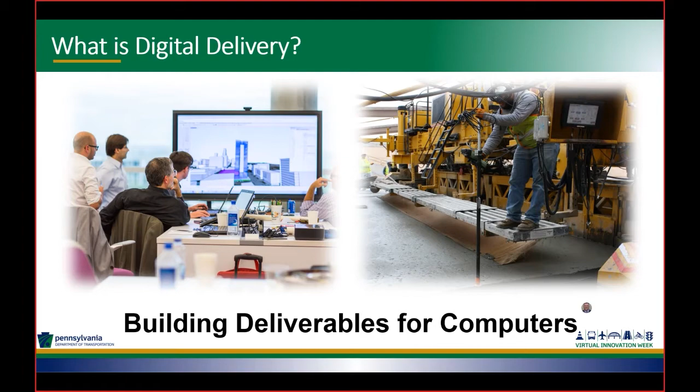What is digital delivery? The basis of digital delivery is really building deliverables for computers. These deliverables are both human readable and machine readable. So digital delivery is the use of digital data to deliver projects.

It's going to be the transfer of relevant information from design to construction to asset management. Right now, whenever we design a project, we gather quite a bit of data in that design aspect, then break that information into 2D plan sheets to deliver out to construction. What we want to do is break that cycle and continue the movement of that relevant information from design to construction.

Right now in our asset management, we get a red line plan that is marked up, and then we get that back to the department, which is considered our as-built plan. We want to be able to make that full life cycle of a project and bring that relevant information back to the department. So we're going to go from design to construction to asset management, and be able to use that data again and again.

It will offer us a new way to view and understand the design in the field. Whenever we put out a digital project, it could be a 3D model. So your inspectors and contractors will be able to view this in ways we've never been able to view projects before. You're going to be able to see the bridge and the roadway all together in one view.

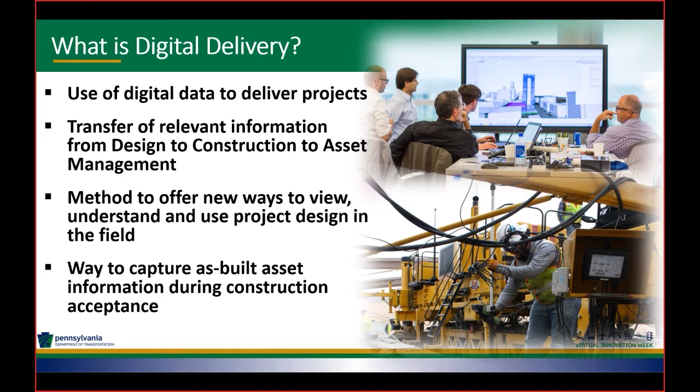So the Digital Delivery Directive for PennDOT is really a time to embrace a new way of doing things. We've always done the design the same way, whether it was back drawing on the drawing boards or today in today's CAD station.

But why? We need to start thinking outside the box and change everybody's mindset because that's how we've always done it. We need to innovate and look for ways to improve what we're doing and be able to show different ways of our design intent.

We need to stop taking that smart data that we're developing during that design process and breaking it into less meaningful pieces.

So there we go. PennDOT's vision: by 2025, construction projects will have the ability to be bid using 3D technology and no longer be in a traditional construction plan format.

This will include the ancillary plans, such as your traffic control plan, your E&S plan. But we do realize there will be projects that don't lend themselves necessarily to being designed in 3D, but will lend themselves to being digitally designed. Again, that is taking that relevant information from design into construction back to asset management.

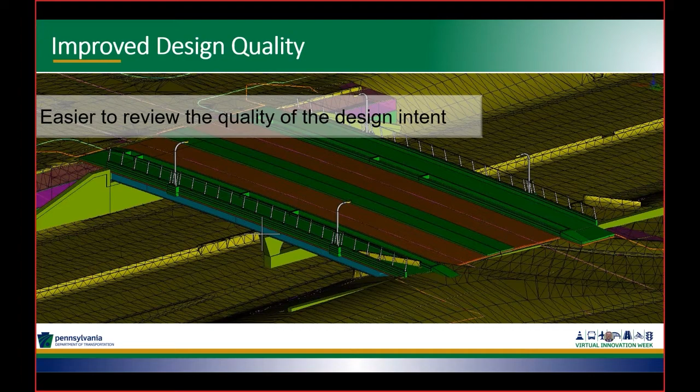With improved design quality, once everyone starts designing using a model-based approach, it will be easier to review the quality of the design intent. A 3D environment allows you to view the design in a way that was just not possible with 2D plans. A model-based design approach will give us the opportunity to review our design intent before we bid the projects, and we'll be able to see the roadway and bridge design details together, which will allow us to find issues early on.

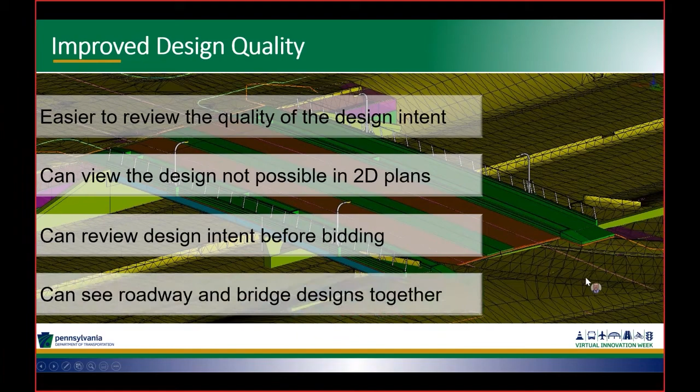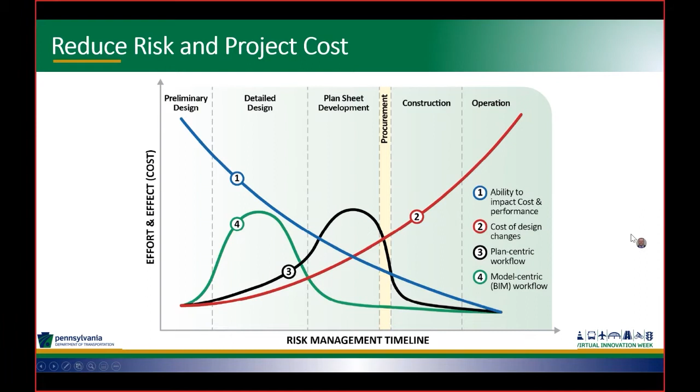So increased construction efficiency. In addition, with the 3D deliverables, contractors will be able to leverage all of this information with their automated machine guidance equipment and survey equipment to check the grades. Today, contractors are using the equipment based on the 3D models they develop from our contract plans.

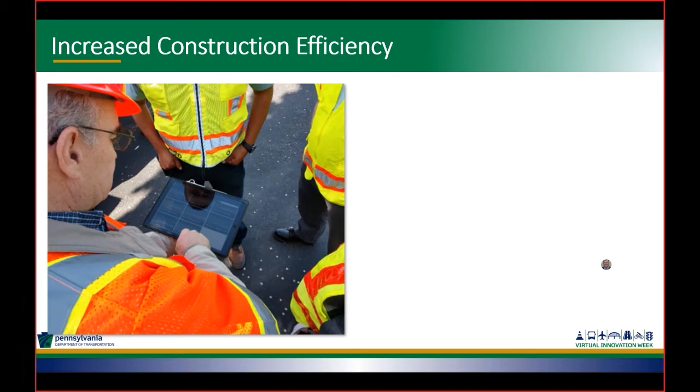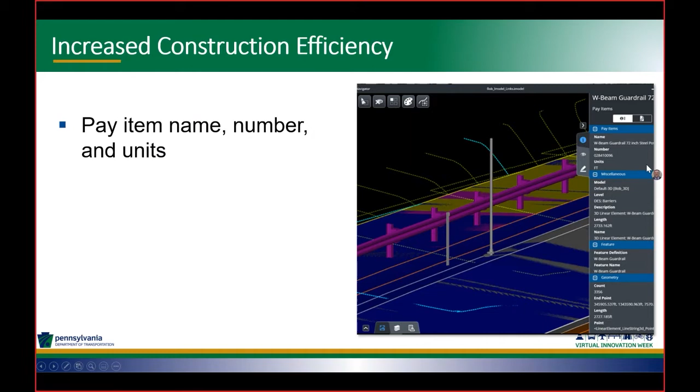So during construction, inspectors will be able to use their mobile devices with model viewing software to actually determine exactly where they are located. The 3D models for construction will offer us an opportunity to extract attributes of these elements right there, so you'll be able to look up the pay items, the units, the level it was drawn on in CAD, the description of the object, the actual length. We'll be able to attach pictures, and you'll be able to attach the standards right to an element.

As coming up through the design ranks, getting that design intent out to construction is vital. Sometimes in construction, they have no idea why the heck the design put it in this way. Well, this will help us convey that design intent to our consultants, contractors, and inspectors that are looking at it. We can add pictures, we can add 2D details. There'll be so much information that we will be able to add to this model to convey, again, that design intent.

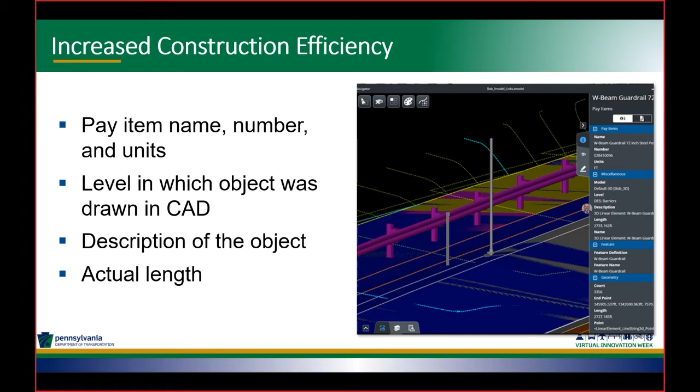But with 3D models, we will get that actual design and be able to incorporate it into a 3D model that we plan to build as the department, which will be considered our digital twin. What we would like to do is build this digital twin for our entire network. Now, that's going to take quite a few years till we actually build this out, but again, you have to start somewhere.

With that information, we'll be able to bring in all of the 3D models that have been created across the state. That way, we don't lose that information that we're losing now. Right now, we lose that information when we transfer from that 3D design to a 2D plan sheet and out to construction. We want to keep all of that information and then build upon that.

So when a utility goes to put a new gas line or water line into our right-of-way, we identify exactly where that's at and then build that back into the digital twin that we would like to develop. That way, in the future, when another project comes out there, we know exactly where all of those attributes are as we move forward. So again, digital delivery is that full life cycle of a project, transferring that relevant information we're developing in design all the way through to our asset management system.

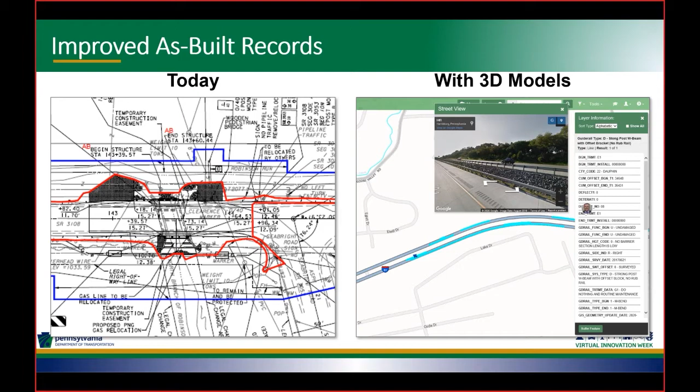So with that, that was a quick overview of what digital delivery is and where the department is going. And I can answer any questions that you may have.

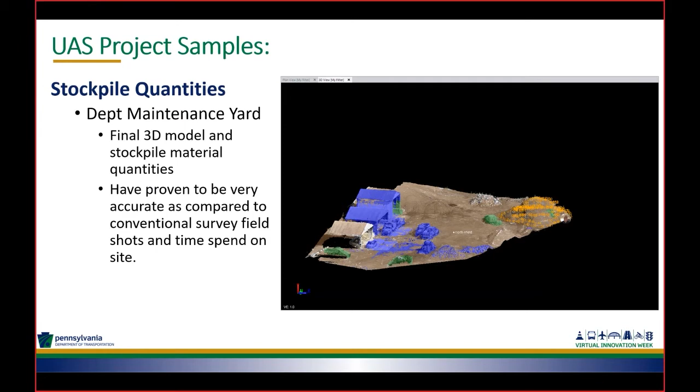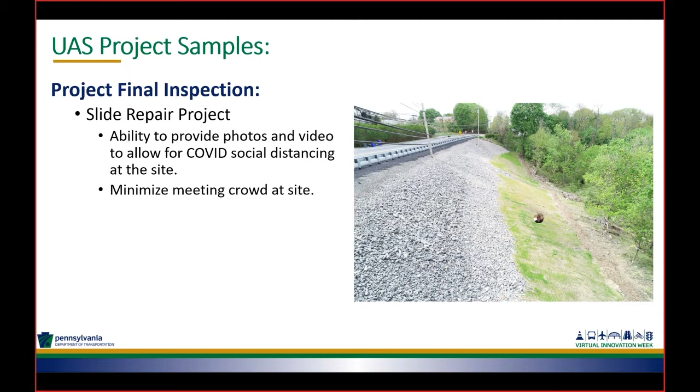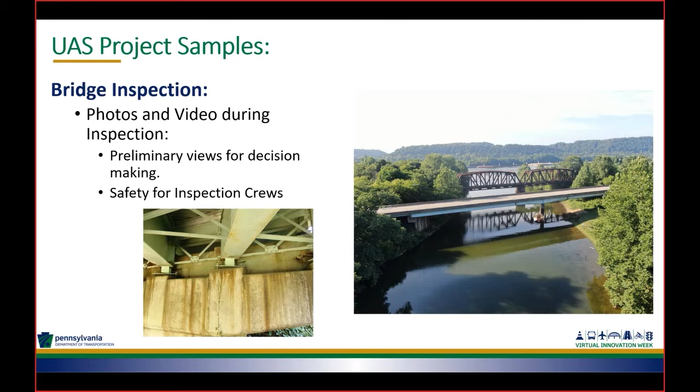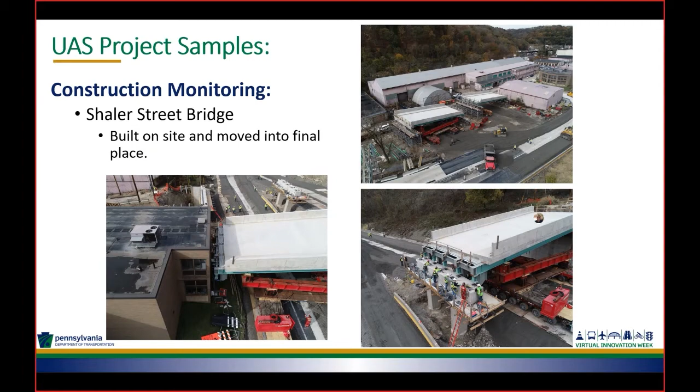I think that's all I have, so probably some questions.

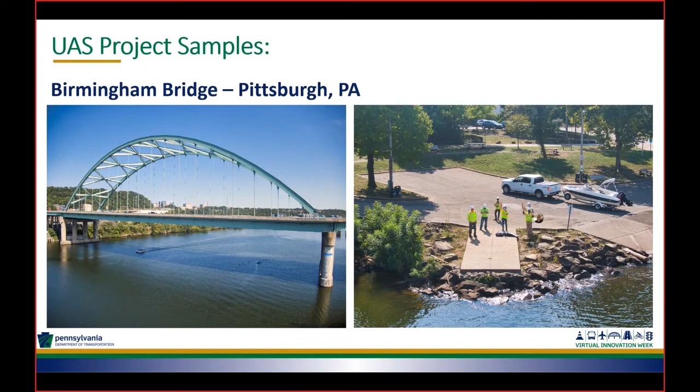We have a couple of questions pending. Can the drones provide live video feed when on projects?

Yes, we're going to be able to do that. We're getting software called Kitty Hawk, a management system to document flights and plan them. Kitty Hawk software has the ability to live feed to anyone else who has the program, so if we have a copy loaded on a computer in the office, that person would be able to see the live feed. I've also been in contact with the Ohio Department of Transportation, and they have a mobile box they use for broadcasting signals live from the field. We're trying to find out more information about that.

One more question so far: how are you approaching the legal aspects of property privacy when you're expanding beyond your legal rights of way?

Unless we're actually specifically intending to take pictures of somebody's private property, we really only have to give them a courtesy notice to let them know we're going to be flying in the area. It's similar to airplanes, where pilots don't have to notify property owners that they're flying over their property — that would be nearly impossible. Drones are similar; we can fly over properties, we just give people a courtesy call to let them know we will be there. Legally, that's really all we're required to do.

So when the pandemic began, all construction was put on hold save for life-sustaining activities, mainly utility work, things like that. So we were scrambling. How are we going to inspect these things? How are we going to verify projects as being sufficient and done in a way that meets PennDOT standards, policies, practices, those sorts of things. A particular project had a tight time frame where they were replacing a bridge, and they had to get it done in a narrow window because of bog turtles. It was immediately suspended, and it was a major arterial roadway that had a bridge being replaced with an HOP associated with a YMCA.

And in thinking about it, we said to ourselves, well, why couldn't we just use technology to do this? Everyone has a computer these days, we're all working from home, there are means of doing this. So we came up with the idea, well, why not virtual inspection? As an electronic means of verifying the construction is being performed correctly in accordance with standards. It was an alternative because our inspectors at the time were not allowed to go out into the field.

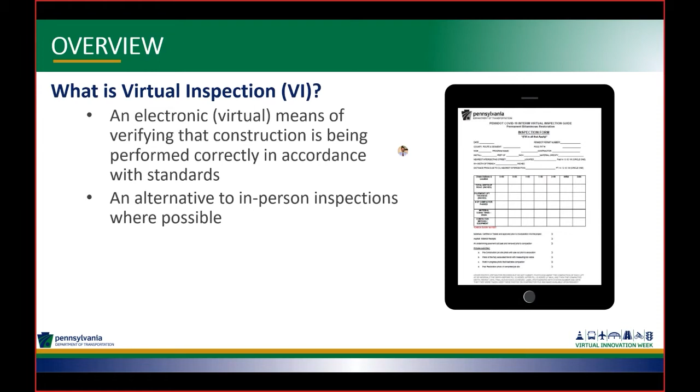That has since opened up somewhat, but we figured these jobs have to go on, and these contractors also had a vested interest in making sure that their work was going to be accepted by PennDOT, because it's a heck of a lot of money, material, men, costs, equipment, everything else, to only have PennDOT come along later and say, well, we didn't witness that trench being backfilled. How do we know what's under there? Well, the governor said we can keep going, we're life-sustaining. Rather than get caught in that conundrum, we decided to innovate and come up with a means of virtual inspection. We needed to do this to keep these life-sustaining projects moving forward while ensuring the quality was maintained.

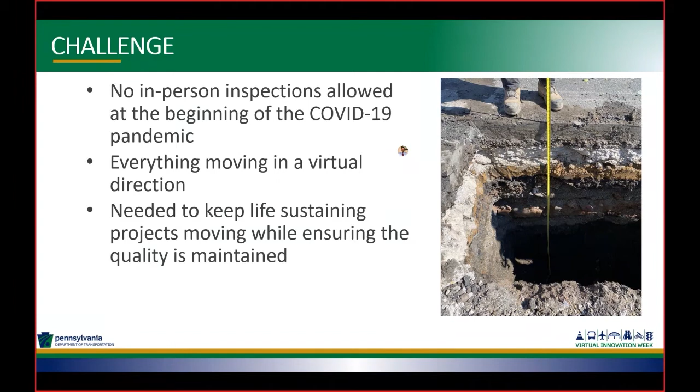So we coined the term virtual inspection as a tool to verify compliance. Our number one partners at the time were utilities because they were doing the bulk of the life-sustaining work. What we discovered was that they were having their foremen complete standard utility forms that basically covered all this stuff - backfill requirements, materials certifications, different things like that. They were already doing this. So what our people did was we took those forms, modified them, and turned them into PennDOT forms with instructions, contacts, and I'll show you them in a moment. We utilized them to document this construction along with technology. Everyone has a cell phone, every cell phone has a camera, every foreman's truck has a laptop. These are tools that were already on site, and these were forms that these foremen were already doing for their companies.

At that same time, I was invited to participate in a statewide task force to develop official COVID-19 policy during the pandemic. We had just created this virtual inspection at the time, and I introduced it to the group. They liked it so much that it was adopted for use statewide.

In coming up with these packets, they contain clear, concise instructions. Right now we have two: one for trench restoration and the other for paving. These are the two main critical items on the roadways where you absolutely need an inspector there. If you don't backfill a trench properly, the road settles and compromises the pavement. With paving, if you get poor material, material that's too cold, or it's not put down in the proper lifts, that can compromise the integrity of the road.

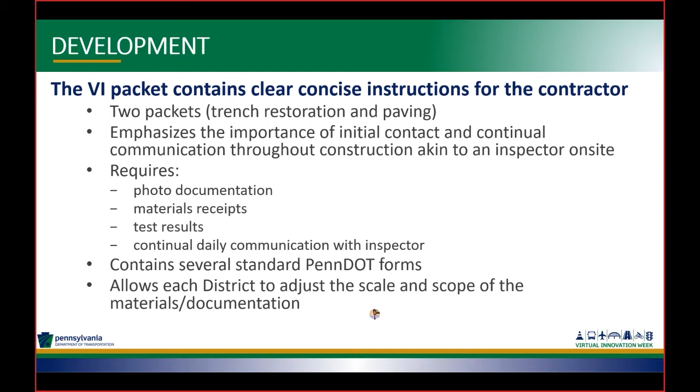Same thing with our asphalt form—it's more or less the same thing, but as it relates to asphalt. Now we're working on developing other forms. We don't have them yet, but that and other items are coming in the future, and I'll go over those in a moment.

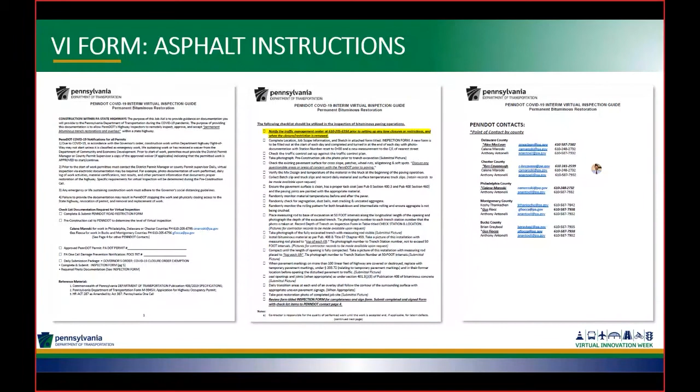What's really nice about this is it can integrate itself into software and technology that these utility companies are already using. In our experience, they found this very useful and very handy, and they were comforted in knowing that their work would be certified.

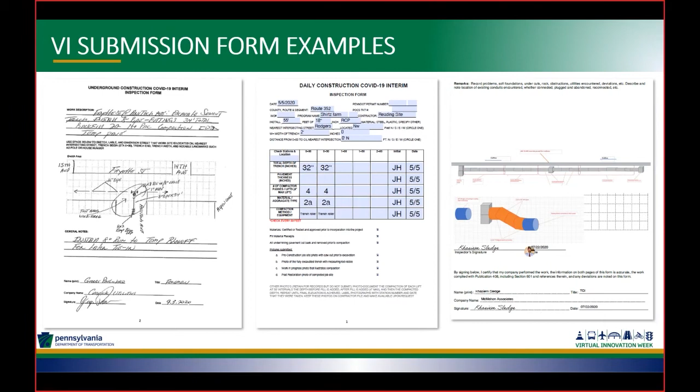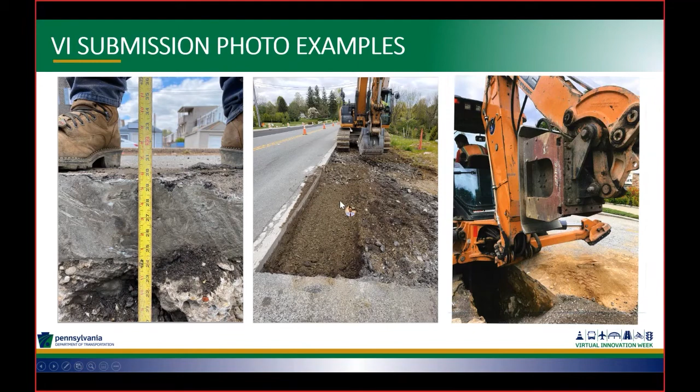The other thing they send us is photos, and these are actual photos from actual virtual inspection jobs. As you can see, a guy can actually measure the depth of concrete, or anyone can measure the depth of concrete or the depth of a lift in a trench. They can demonstrate there's some 2A modified stone being placed, various excavation activities, concrete being poured, showing us the depth of the concrete, various things.

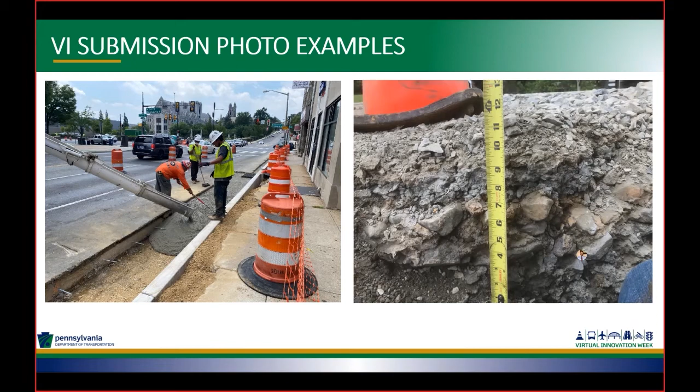So these accompany the forms that are filled out, combined with that constant and clear communication, and basically represent the best possible alternative to us actually having a person present. The benefit is that, even during normal times—and it looks like this virtual inspection is going to last well beyond this pandemic—it allows us to stretch our limited resources. We're able to cover more jobs and ensure the quality of those jobs more readily than one inspector stopping by once every couple of days.

Before, it was more like, 'Yeah, okay, I guess that looks good.' Now we're getting reports every day. We understand what's going on, and for the most part we've got a very good level of compliance. I've highlighted the importance of the communication and coordination, and this is the biggest selling point to the contractors and utilities.

It allows them to certify their work. This is in their interest, and that was very important as we sold this to them. So it didn't become, oh great, here's one more thing PennDOT wants us to do. No, this is for you. This is to protect the integrity of your work. This is something that you should value because it helps your business.

And when we came at it from that angle with them, we got great buy-in. I mean, they were really enthusiastic about doing this because they knew that it would ensure that they could continue with their work, that they didn't have the fear that the work would be somehow rejected or not accepted in any way. And most importantly, during this very unfortunate and sad time, it allowed the economic activity to continue.

It allowed critical projects to continue. It allowed people to have lights on in their houses, water come to their houses, and gas flowing to their stoves. Things like that, let's face it, anytime are critically important, but especially during this pandemic. It protects the health and safety of workers because now we know they're following the rules.

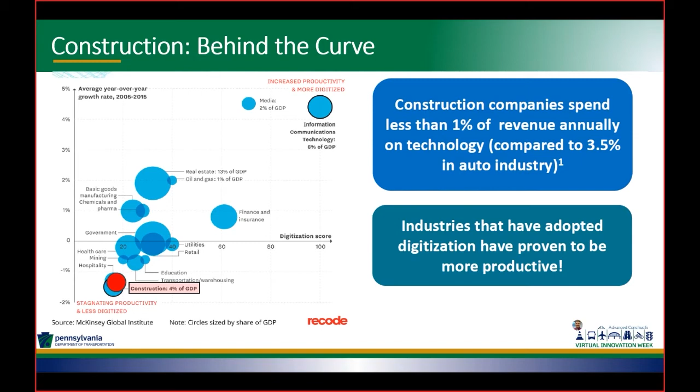So as I mentioned, the department's been at this for really mostly all of the 2000s. Many of you are probably familiar with our ECMS system, where we do all our electronic bidding, contract management, and payments. All those things are housed in that ECMS system. And that's really our number one and key legacy system.

The other system, PPCC, that's for all of our submittal workflows. Our contractors are able to submit documents through that. We have automated workflows. It really becomes kind of our filing cabinet for project records.

And lastly, as far as our legacy systems, is ECAMS. This is our materials system. So all of our suppliers are currently entering their JMFs for asphalt and concrete into this system. When we take test materials out on site, those are reported back into this system. So it's kind of simple to think of this as our materials warehouse.

So those three systems really make up what we're calling our legacy systems. They retain the data. Now it's just a matter of how we access that data. And that's where the mobile construction comes into play. So we recognized that we needed to get something in the hands of the folks out in the field to access this data readily and easily, and how are we going to make that efficient for them in the field?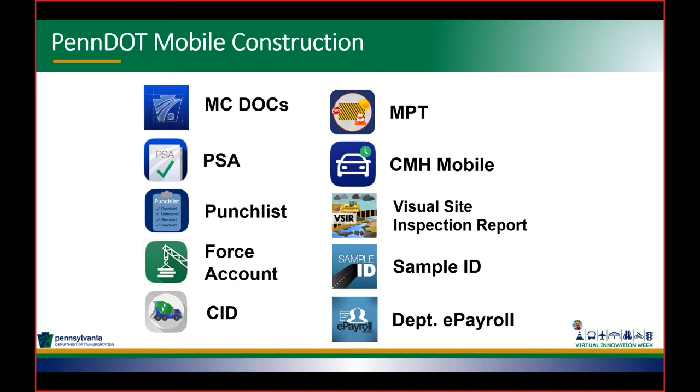So as you get into these things, you have to remember it doesn't happen overnight. One of the greatest challenges we had with the mobile side was introducing Apple into a Microsoft world. All of our systems we've used to date were always Microsoft. So there's need for technical support, resourcing, finding experienced team members that can help with those.

And even one of the great challenges I use as an example is the Apple user agreements. When we started this process, we handed that user agreement for signature over to our attorneys. They marked it up heavily with red pen, sent it back to Apple, and they said, 'Thank you very much, but we are not going to make any modifications to our policy. Our policy is what it is. We do not make modifications. Your business is not that important to us. If you want to work with us, you have to sign our agreement as is.'

And that became a real sticking point that could have stopped all this. And that's where it becomes important to make sure that you identify and recruit business and executive champions to support this throughout, from the top to the bottom of your agency.

So that went to the secretary and quite honestly to the governor to say, are we in agreement that we can sign this Apple agreement even though our attorneys disagree? And we had that support clear up to those levels, and we were able to execute that Apple agreement unmodified and proceed forward. So you can imagine if we didn't have that support from top to bottom, this could have all ended very quickly.

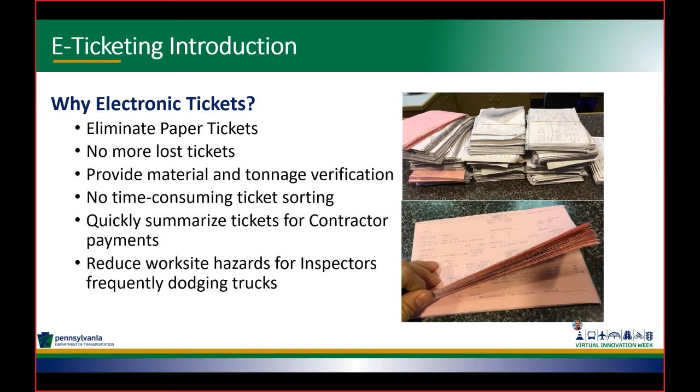So in District 11, we took this e-ticketing specification, and we also wanted to go a little bit farther with it. So we added GPS tracking for all the equipment associated with the paving and milling operation. This was a fully integrated GPS system with the plant scale system. It gives us the ability to measure and track material from plant to final placement destinations, and also provide real-time data with web-based systems compatible with both iOS and Windows environments.

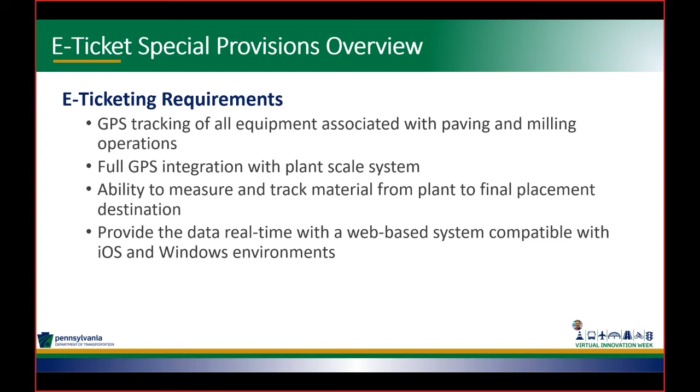So with that, in 2017, in District 11, we piloted e-ticketing on 4 group roadway projects in Allegheny County. The district special provision took e-ticketing one step further, as I mentioned, with the GPS tracking. And it resulted in a special provision of electronic delivery management for HMA and WMA materials. We also had another special provision added for tracking the delivery of milled materials to a specified plant or stockpile site.

So we had numerous occasions where we potentially had millings go missing, and as that was a commodity for us in the district, that was a sensitive subject. So we wanted to make sure that we could track where that material started and ended, to make sure we got our material as properly promised.

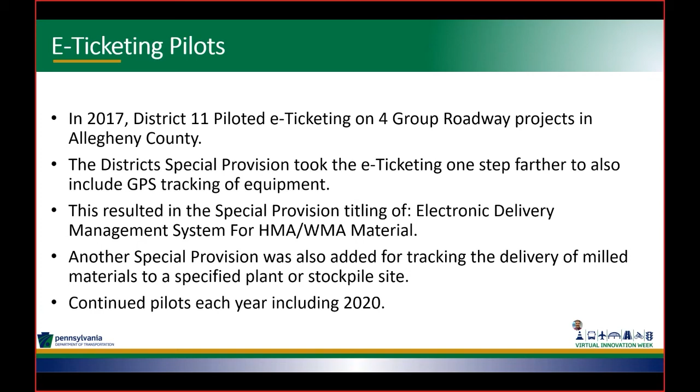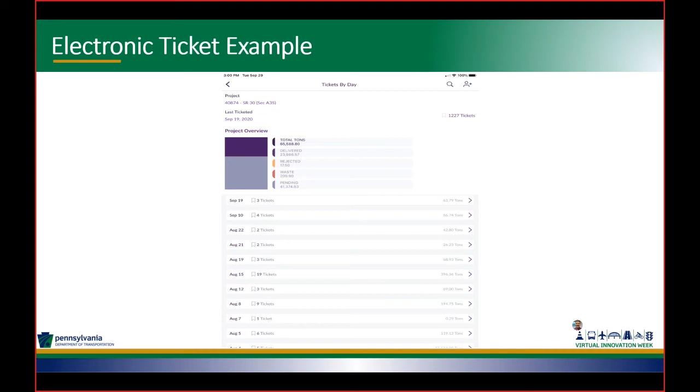So what's next? Well, 2020 happened. The COVID suspension went into place, and as we were coming out of that, it was, what are we going to do when we restart projects? How are we going to handle paper? What options are available? We were talking about putting paper tickets in Ziploc bags and quarantining them. Can you imagine how long that would take for payments?

A lot of folks across the state were all voicing their interest in, can we get electronic ticketing now? How do we do this? And the industry was in support of it, quite honestly, as well. So where we're going next is e-ticketing 2.0, we've kind of coined it. It's going to be the evolution of that e-ticketing process to go statewide.

So under the guidance of Kelly Barber, we really pulled together a great team of not just department personnel, but industry, from contractors to suppliers to trucking, and brought them all in as a team to discuss where we're going to go with this e-ticketing effort. We also wanted to expand it to not just asphalt, but also to concrete and aggregates.

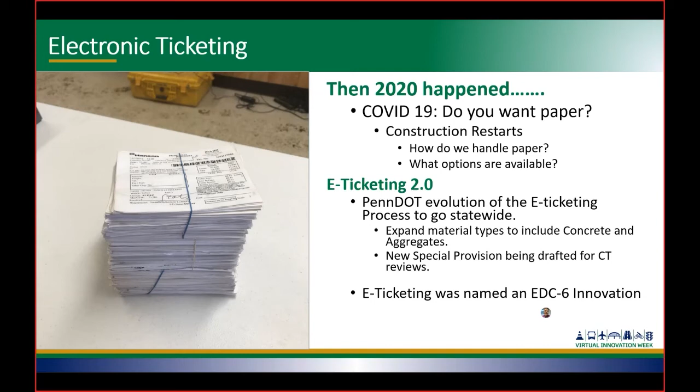Lastly, I just want to talk about some other little things that we have going. So in the mindset of all of our innovations, we also want to think about maintenance and how, when construction's done, that project goes into maintenance hands. We want to make sure we're getting that data that they may need for their attention in the future. A great example of that was the guiderail mobile app that was put out.

So when we're installing guide rail in construction, that information is then being put into the maintenance system where they're able to monitor that and source it as needed. We also want to get our contractors involved. There was a STIC initiative with the APC to vet their industry and see what interests and capabilities they have with these mobile technologies.

And so we have a lot of those apps that I think we can give access to in some parts or manners that would help facilitate not just improvements for us, but for the contractors as well to increase their productivity. And lastly, RFID tag technology. This is something that's kind of out there. A couple states have been using it, and I think this could be a potential benefit to us with tracking materials and being able to pull data out by scanning one of those tags. You could get MSDS sheets or testing reports or things like that, and also maybe help with future inventories.

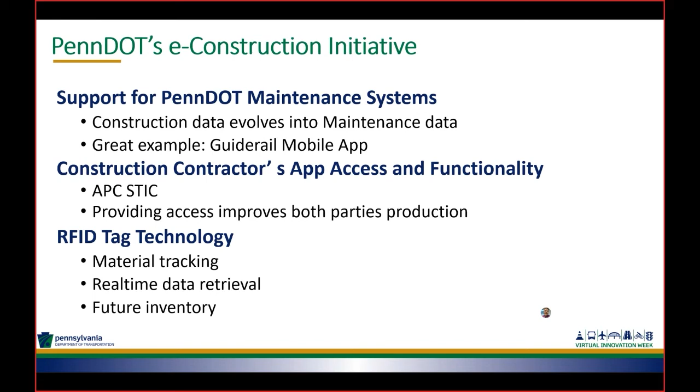So again, a lot of great technology out there that we're going to be implementing, and along with the support of everybody else speaking today, there's great things that are going to be happening in the future with us. With that, I'll turn it over to you, Ken.

Yeah, thanks, John. We do have a couple of questions for you. So from a local government standpoint, speaking from the local government's perspective here, are we understanding correctly that when we go through our annual audit of our liquid fuels e-ticketing, will it be accepted at the local level as well?

Hopefully all this is not in place yet. We'll be piloting next year and see how the groups come along. It may take several years for this to fully be implemented across the state in every aspect. But we have another portion of the team on there. I forgot to mention that as well from our maintenance side with the materials they purchase. So yes, all those would be incorporated into this, and I think those will be great benefits that come out of this to automate that system.

John, I know in some past conversations you talked about technology being great when it works. We have a question here from an anonymous attendee: technical advances are great, but what do you do when you're working in areas where cell phones, tablets, and GPS maybe don't work for lack of signal? How are you dealing with that?

Yeah, so we have thought about that. We've talked through that with many folks. One of the things we're looking at is that whenever we approach any mobile app, we always design it to work offline. So we could easily capture the testing information, put in a ticket that you can't get electronically at that time, just put in the ticket number. And then a lot of those tonnages and things like that will auto-populate once you get back to a service location. We're also talking about how that's delivered in the truck with paper tickets now gone. They may have capabilities to airdrop an electronic ticket to verify who they are and what they are, and identifying trucks is a key important factor with that too. So we have some possible solutions, and we'll be vetting those out to see how they perform over the next season.

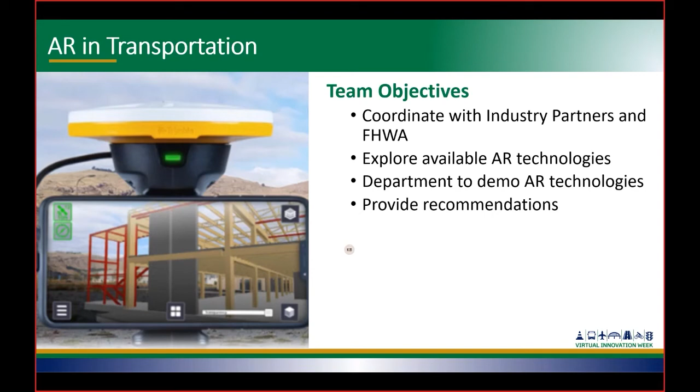If you have any questions or ideas for augmented reality usage in transportation, please reach out and share those with us. We have just started this effort and are looking forward to its possibilities.

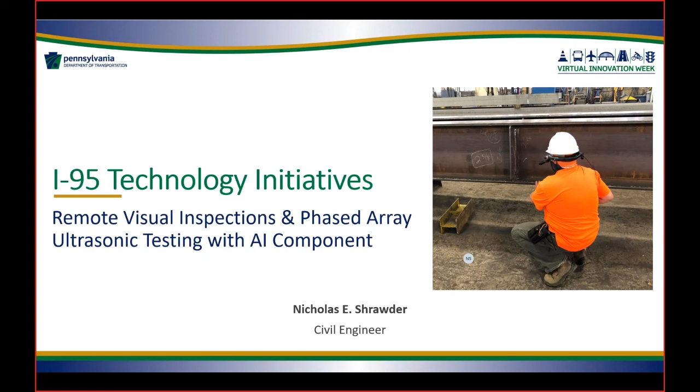We're currently in the process of piloting two technologies on the I-95 Betsy Ross project located in District 6, and we're doing so via special provision. Those technologies being remote visual inspection and phased array ultrasonic testing with an artificial intelligence component. Unfortunately, the fabrication aspect of this project has not started yet. It was proposed to start in January, but I think that's being pushed out a little further due to scheduling issues. However, we were provided some of the equipment just for our inspectors to get familiarized with.

So I have a little bit to share with you. The remote visual inspection, you can see here, it's an OSHA compliant hard hat attachment. It has a camera and an extended arm that acts as a microphone and also a window for viewing shared files.

We have consultant inspectors in our fabrication facilities overseeing work as it's being processed. The capabilities for them will be able to live stream and communicate directly with project managers, capture photos, and record videos that can be shared later on. From a remote user standpoint, the project manager has the ability to zoom the camera during live feed, capture photos, and also share and annotate documents that will be populated into that microphone extended arm window.

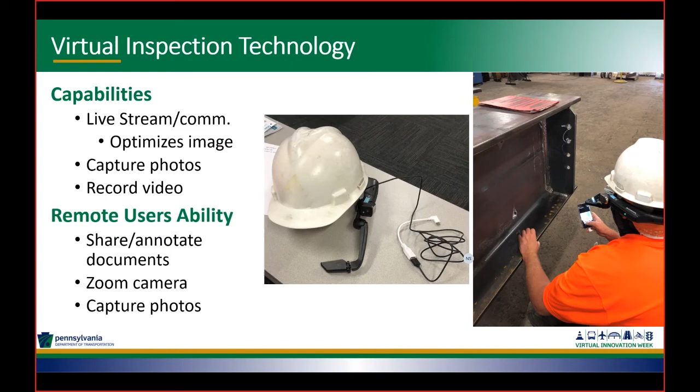In our current times, you can imagine that this would be especially useful during COVID, as Fran has mentioned earlier, for the construction aspect. The fabrication facilities that we oversee are actually nationwide. We have active facilities in Nebraska, Utah, Virginia, Maryland, and Ohio.

From our standpoint at the structural materials section, it would allow project managers to access multiple fabrication facilities daily to oversee issues that might arise. Another benefit is that it reduces the number of follow-up conversations. It allows the inspector, project manager, and whoever else on the staff to gain an understanding of the issue, both seeing the same thing at the same time and get that understanding, because understanding's half the battle.

Also, from our stance, we don't really have a whole lot of fabrication issues. The current project that we're working on is about 30 girders. I think they're all nothing really abstract.

So from a pilot standpoint, we defined some predefined hold points to use the system and gain an understanding of how well it's going to work. We're looking at this from an hour a day, or an hour every other day, to capture fabrication from start to finish throughout those 30 girders that'll be fabricated over that month and a half, and see how well it works in each aspect.

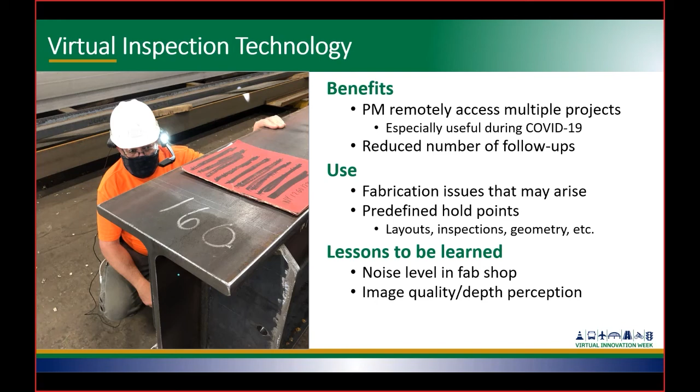So switching gears here a little bit, but staying with the digital delivery theme, phased array ultrasonic testing. It's a non-destructive test method that's being proposed for use on critical welds. Our current practice is radiographic testing, and fabricators are pushing to replace that with this advanced ultrasonic practice.

So the benefits of this is that you gain advanced visual aids. There's potential to reduce inspection times, which ultimately will reduce costs. You reduce the human factor in the interpretation of data files. You still maintain a permanent record like we would with an X-ray or radiographic test.

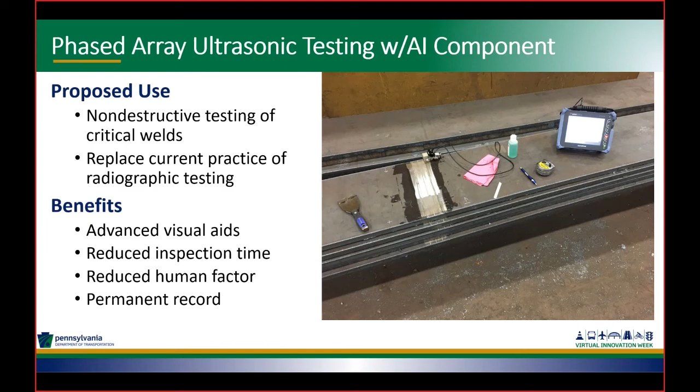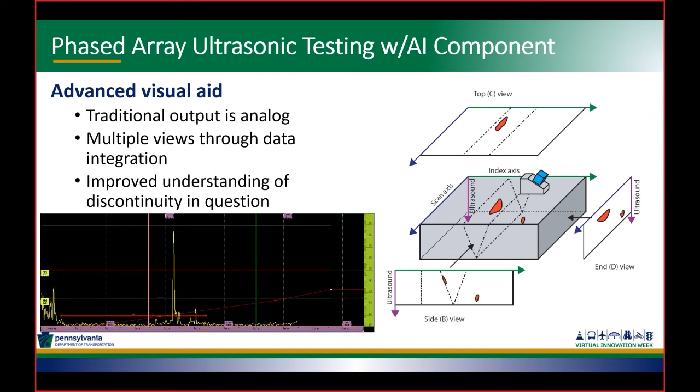Just to show you what those outputs look like here, you can see you get the cross section, the plan view, the end view, and you still maintain that waveform output. You can imagine looking at the waveform output alone, you wouldn't really have a good understanding of what the other images are doing without having the probe in your hand yourself and doing a little bit more advanced analysis than we currently do now. So this adds that advanced visual component.

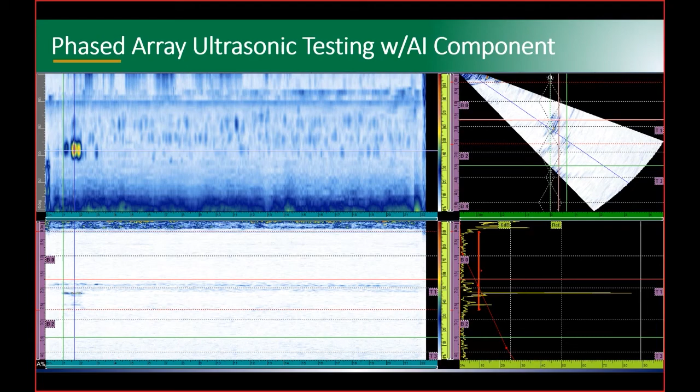So we're taking it a step further than just a phased array test. Like I said, we also want to reduce some of the human interpretation aspect of it. So we integrated into the special provision an AI component—it's actually an assisted data analysis component, if you will.

All that data gets collected, and then it gets post-processed into a secondary program. That program first scans through the data and assesses how well it was collected—is there any skips in the data, was there any loss of data? Afterwards, it'll search through and evaluate if there's any discontinuities, measure them, and provide direct outputs. Currently this would be done by a human and could take 5 to 10 minutes or more for an individual weld based on how long and how thick it is. By using this secondary system, it happens almost within seconds.

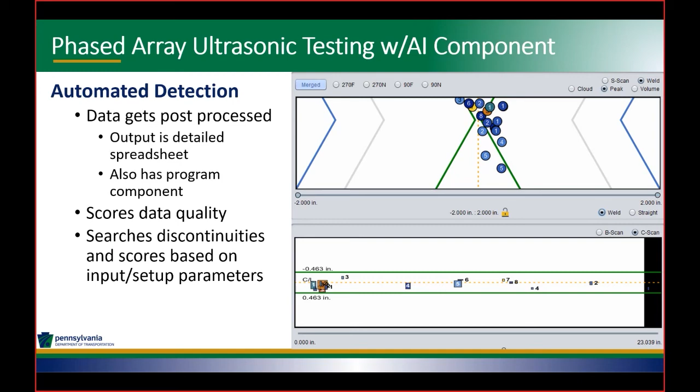This system has two outputs. It has the secondary system output that you can see here on the right, where it would identify any potential discontinuities that need to be further evaluated and possibly repaired. But it also has a very detailed spreadsheet, and I'll show you that here—a detailed spreadsheet that gives you an analysis of every data point that was collected. This is just a summary of that spreadsheet, but there are individual sheets that follow for each data point, making an assessment of how well each point was collected and if there are any possible discontinuities.

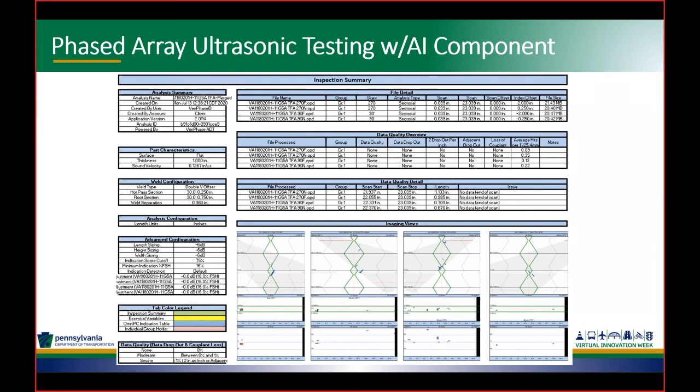So that's just a little bit of what we're doing here at the structural materials section, and I'll turn it back over to Danielle.

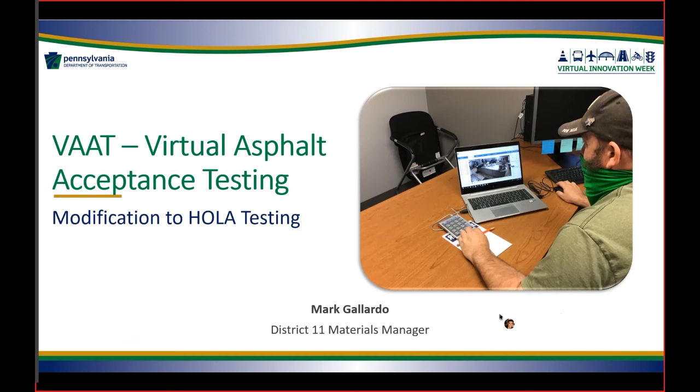So what exactly is VAAT and how did it originate? Well, it's a modification to our HOLA special provision where we're utilizing high definition cameras. For those who aren't familiar, HOLA is the acronym for Hands-on Local Acceptance, where the districts perform the asphalt acceptance testing locally. These tests are performed by a PennDOT materials inspector and witnessed by the asphalt producer's certified technician. The difference here is with VAAT HOLA, the testing is performed by the asphalt producer's certified technician, and it's witnessed remotely by the PennDOT materials inspector via the HD cameras.

This was proposed by Lindy Paving and PAPA, basically proposed by the industry as an option for 100% state-funded projects, and not necessarily a permanent replacement for our current standard HOLA procedures. It was initially developed to ensure COVID-19 protocols can be met. At the start of COVID-19, there were some very strict protocols, and we wanted to ensure that we could continue local acceptance testing safely. Witnessing these test procedures via cameras means our inspectors and technicians don't have to be in the same lab. We're currently piloting it in District 11 for ECMS 105248.

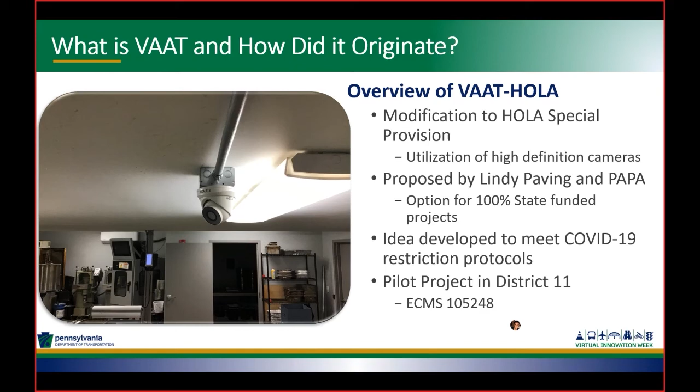So some of the specifics for our pilot project: we required verification samples so we can gather data for companion loose box samples per sublot. The verification testing is performed by department personnel, and the number of tests depends on the lot size. If the lot is n equals 3, the representative will randomly test one sublot. If it's n equals 4 or greater, the representative will randomly test 2 sublots. We're taking these verification test results and comparing them to the acceptance test results.

So why use VAAT HOLA? What are the benefits? It's another option for acceptance testing in HOLA. Again, this isn't proposed to be a permanent replacement, but as an option. The testing can be witnessed from virtually anywhere where we have internet connection. There's no stoppage or delays to acceptance testing. We certainly hope there's no future shutdown due to COVID or any other reason, but if there is, the testing could continue. And lastly, potential cost savings for the department.

Basically, less travel time and less travel distance for our inspectors. And the picture there is basically one of our materials inspectors witnessing some of the testing being done at the lab.

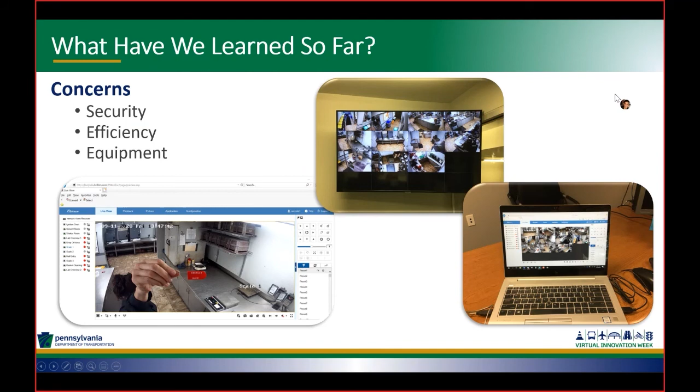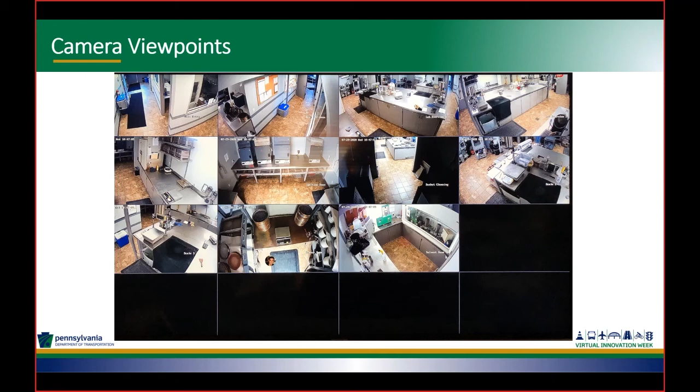This is basically just a picture of the camera viewpoints at the Lindy's facilities. They have 11 different cameras basically spaced throughout their entire lab. And that's about it.